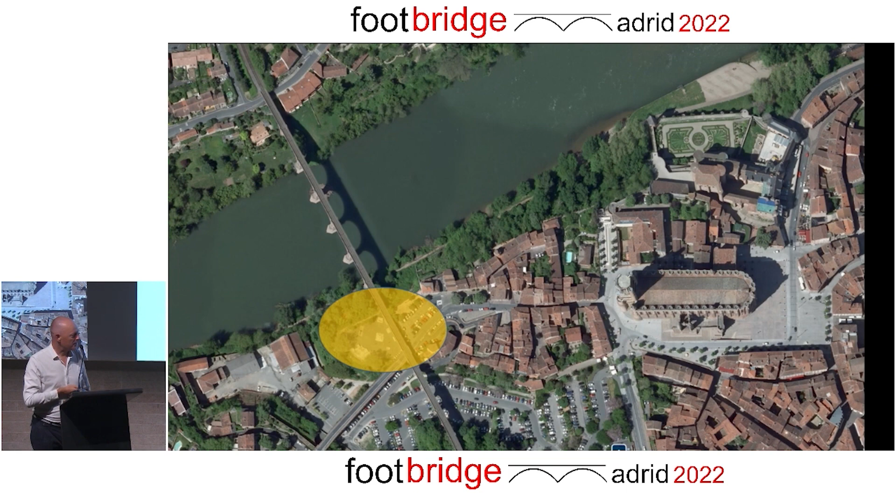And that was the situation - no quality anymore, we are outside the city. And one of the big questions was, how can we bring back quality to this important place, to this important viewing place also? You see it here on the Tarn, because you have the Tarn River here with a curve, and you have a very beautiful view there.

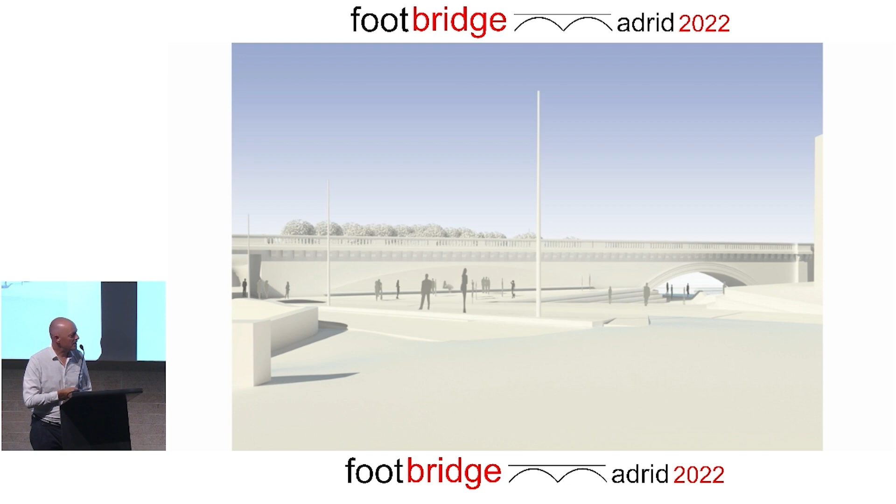This idea of creating a small plaza, we wanted to use it also on the bridge, because it's one of the features of this city, and unite the place outside and inside of the existing viaduct. The important thing was to create a visual relation between the city and the water. It disappeared because this was not visible. We proposed to reopen this, to have a slope, and to have this relation with the water again. And here you see that it works quite well.

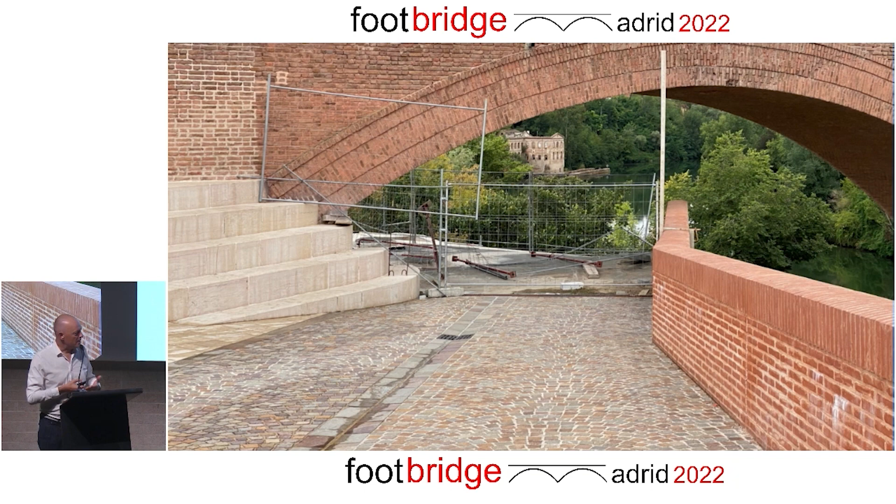It was also one of the questions of the competition: do you build the bridge on one side or the other? We had no choice. By opening this view, it was natural to build the bridge on the other side.

A morning view with the sun on this viaduct, and the materiality of the city. Everywhere this brick, very typical of the region. We used it, we didn't reinvent the walls, we used the same details with the same brick.

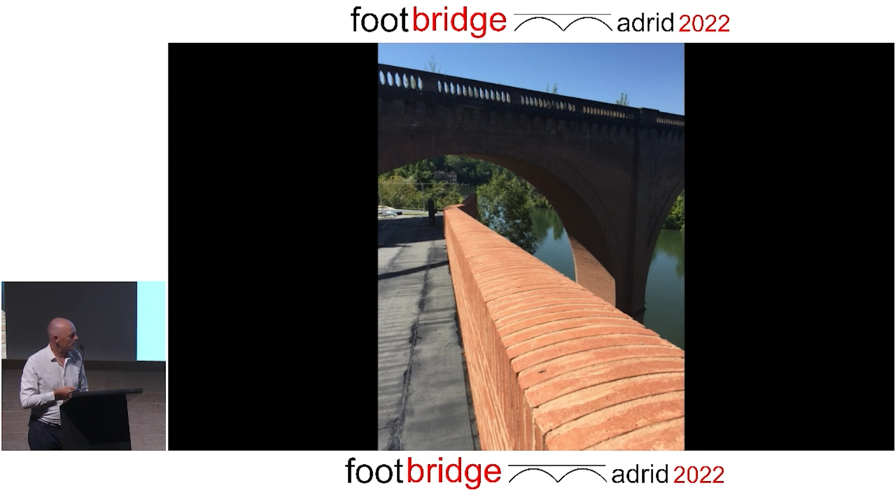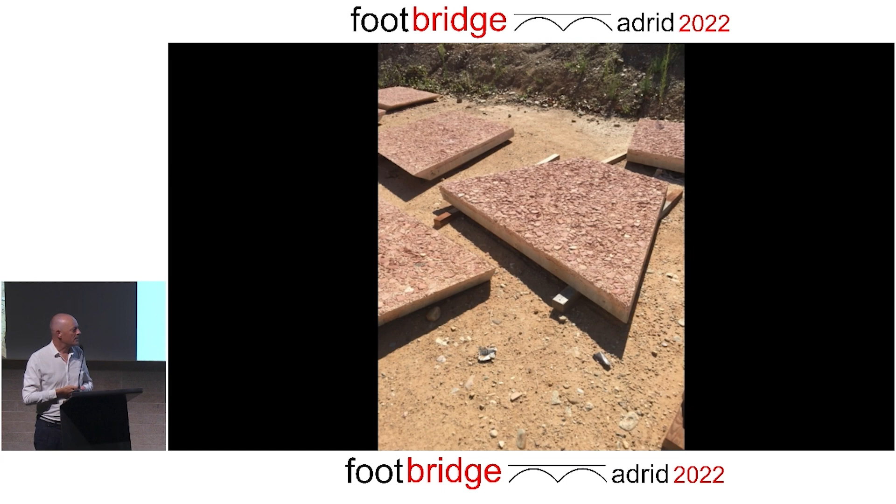But of course it was not possible for economical reasons to use it everywhere. For some part of the retaining wall, we did this concrete, made with the same stones, the same bricks, so it has the same materiality, even if it is not made in the same way. An image in the shadow, I have no better image of this wall.

The bridge itself, yes, you have to react, to have a sort of dialogue between the new and the old. Instead of doing a straight line, there's a small undulation in this line, in this new bridge. I like this because it's a sort of respect of the existing, but it's also a way to show people who pass where they are.

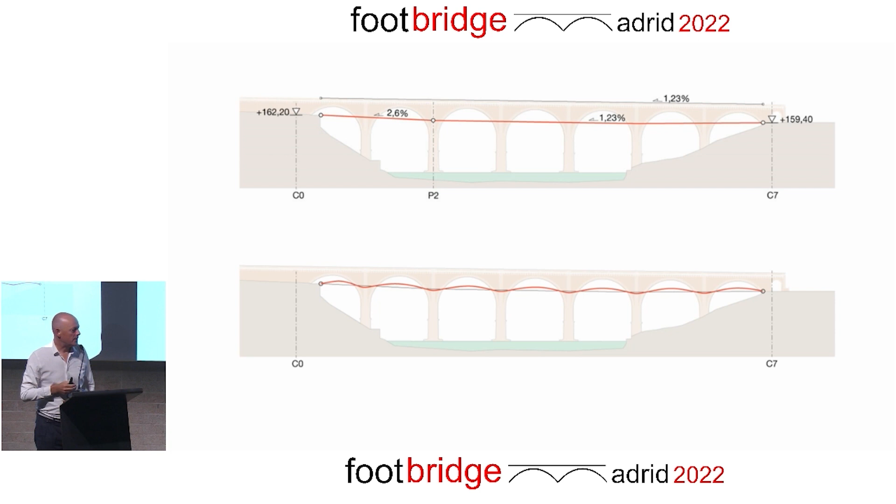So there's a relation between the spanning and the geometry, the user experience when you are passing the bridge. And these balconies, these small plazas, are also one of the features of this new bridge, and it gives new perspective to the existing

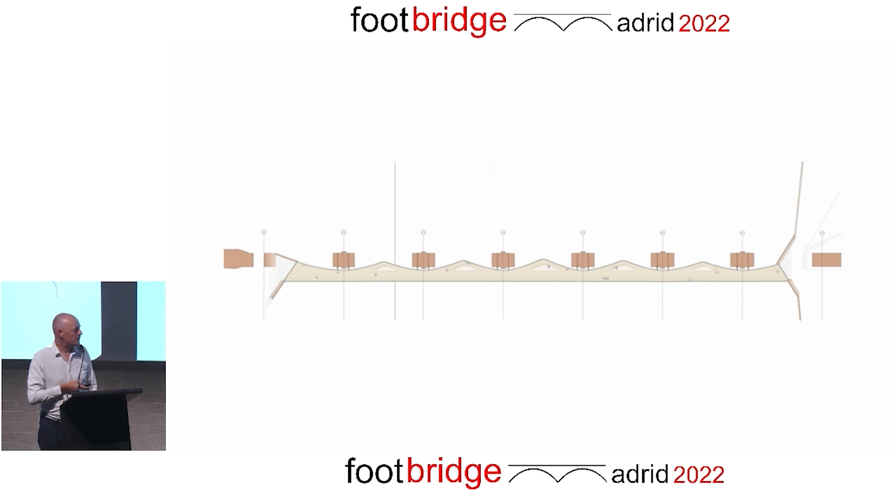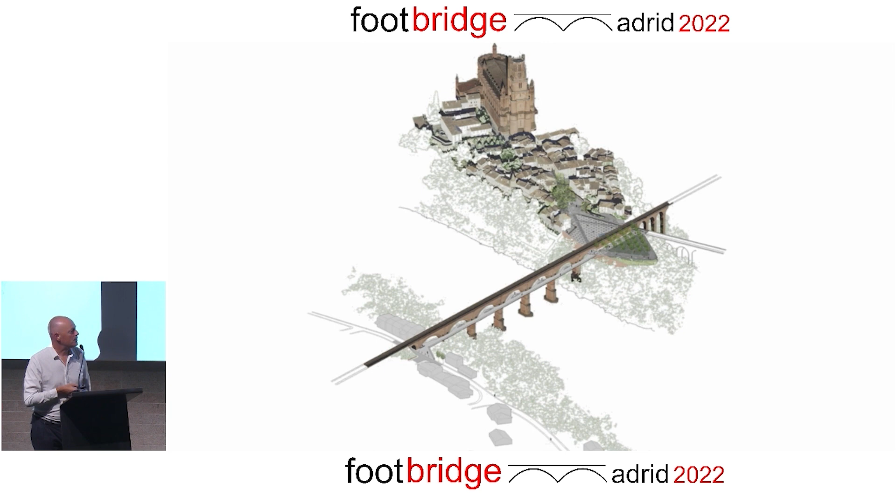city of Albi. And this was one of the important arguments when we defended the project before a UNESCO committee, so that finally we are not destroying the city, but we give tourists and the people there the possibility to view the city in another way.

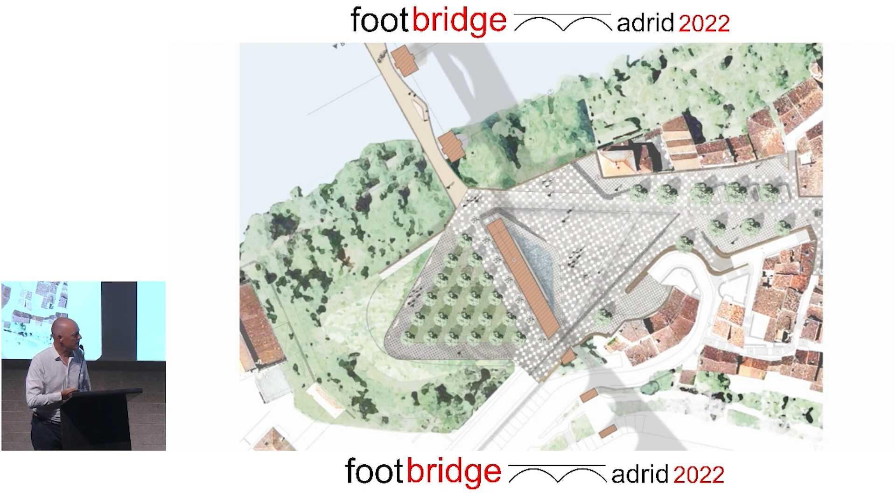The connection between outside and inside, by passing through the first arch, we can recreate a sort of unity between the two parts of the city.

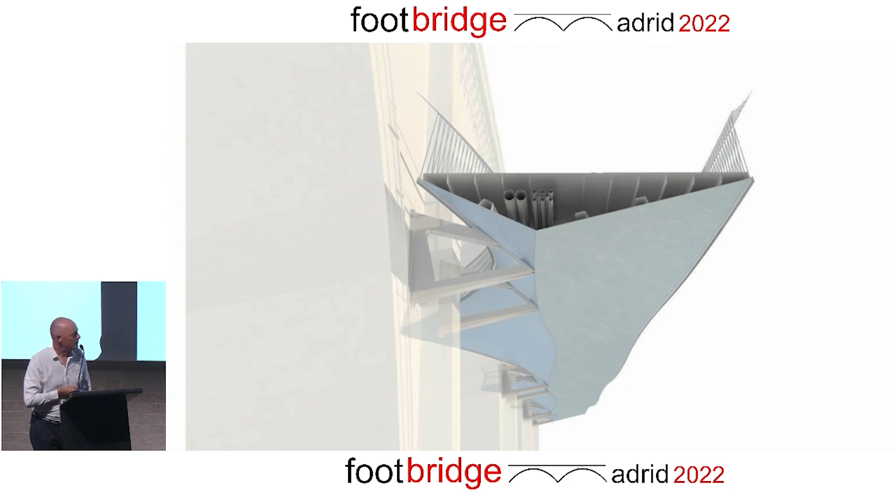Some sections: it's a box girder, triangular, with a variable shape, and some renders where you see that there is real good integration.

And this vibration, it's a little bit like, yes, for me, this massivity of the existing, and this is a sort of jewel, sort of necklace, a sort of cloud, a mist around the existing viaduct. So we are not going in competition. We are using one another to enhance the quality.

Color is important. I always choose the color on site because the reflection of the surroundings, the sky, is very important. So never choose a color at the office. Go on site and choose.

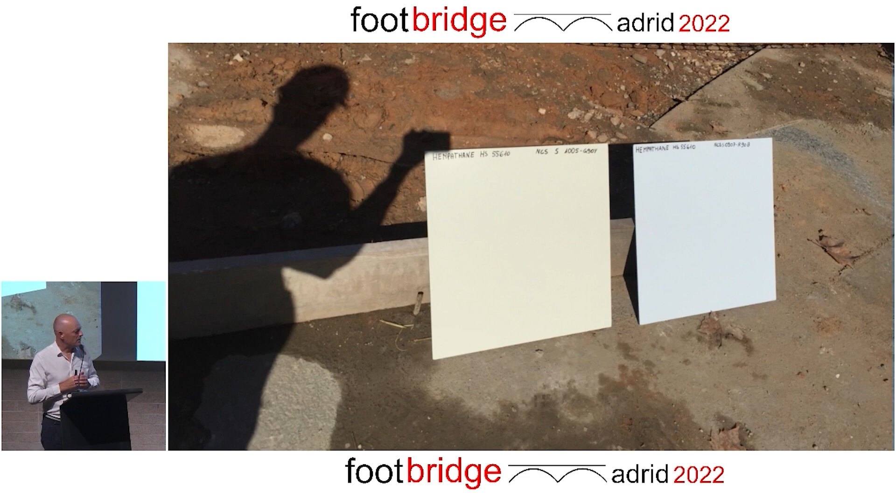And you see that we have two different colors. We have this more beige and the more bluish. The bluish is for the underside and the other is for the top part of the bridge. And that's a sad story about this.

It is not built yet. I took this photo 2 years ago. So the bridge is finished, but the first contractor went bankrupt, the second also. So now we are waiting for the third one.

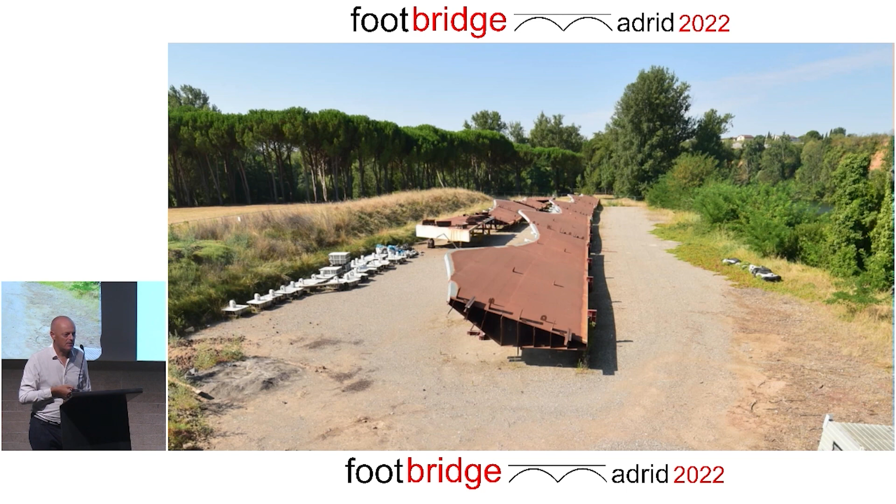That's also the reality of our profession. We are dependent on other persons, and sometimes it works well, sometimes it does not work well. So we're waiting to be built, or waiting to be rusted away, I don't know.

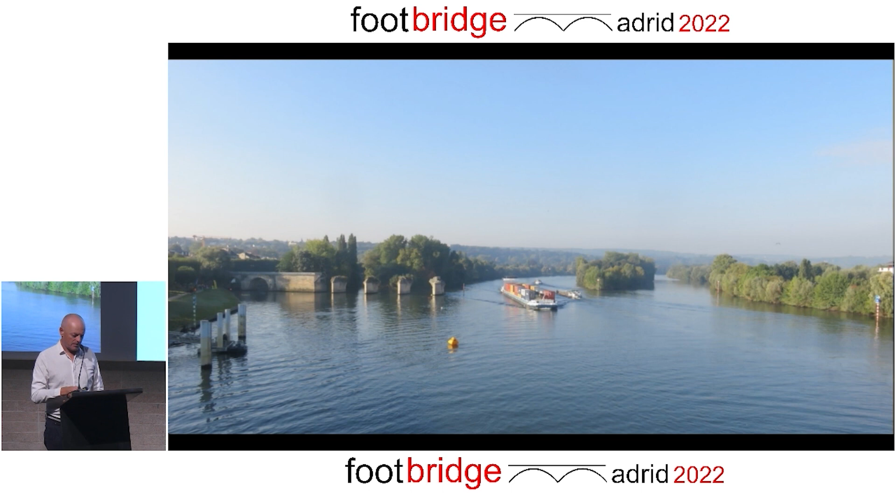Another thing, it's about the bridge in Poissy, where there was this historical link, and I want to tell something about these bridges, because it was not one bridge. Over time, the bridges were destroyed, rebuilt, destroyed, rebuilt.

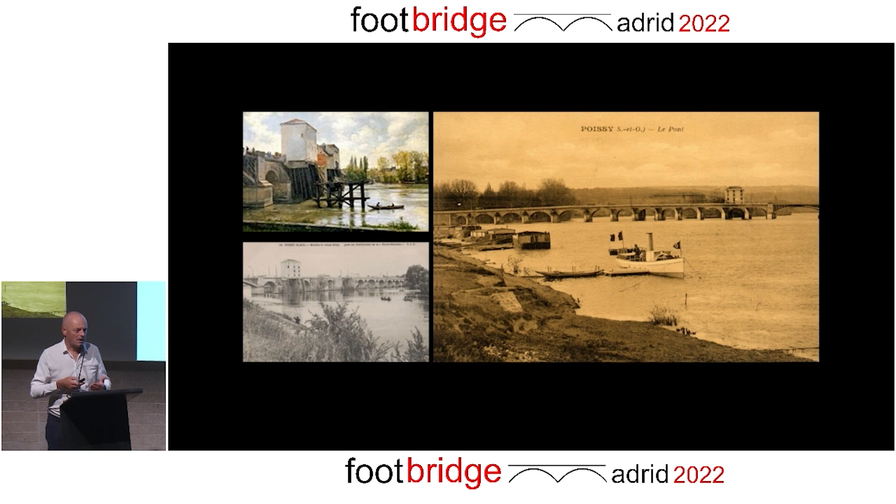But what is the permanency? What is the invariant? It is the connection. The connection stays always on the same place, but the bridges, they change over time. And this is a project about this reflection over time, and how can we say something about this resilience of the existing. It was not possible to touch these piers in the water because everything is protected.

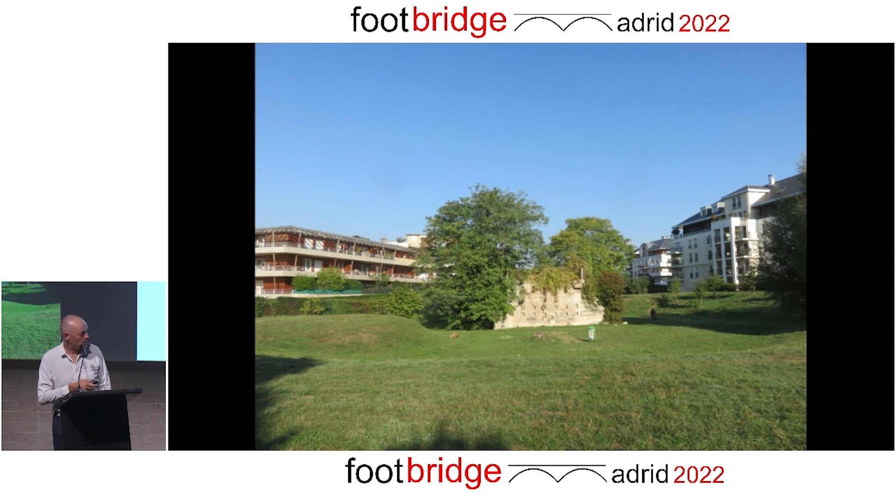And this is the other side, with something which we didn't understand in the beginning because it was in the green and not in the water. And they put also some panels to explain, because otherwise you don't understand.

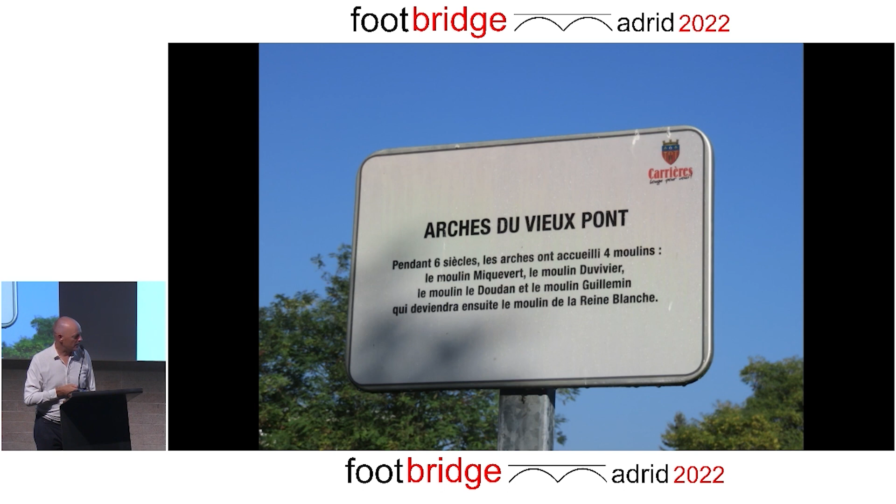And you see also that there were a lot of mills there on the bridges. So these bridges were also a sort of ecosystem because there was a lot of commercial activity, and maybe we can learn something from that.

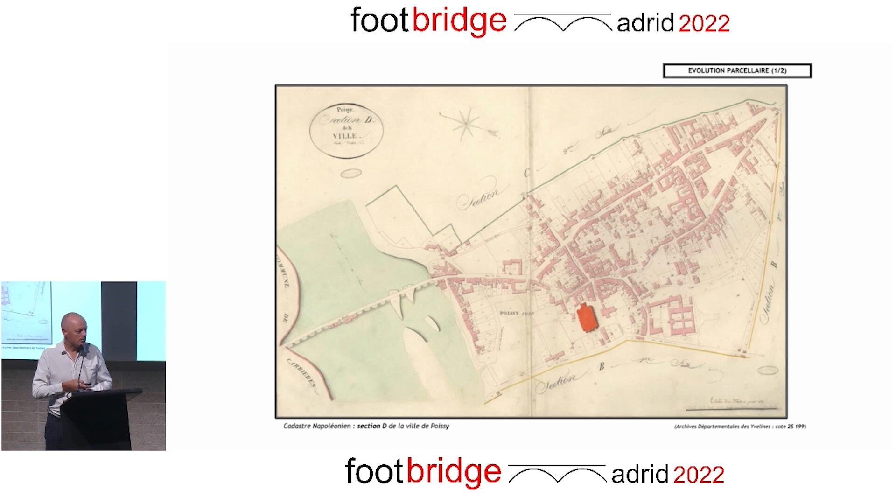Yes, it was in the time, it was a ford, and I think it evolved to a sort of bridge. So it tells also something about this resilience of the connection.

Yes, and we dream to reopen this and to have what we call the Seine tranquille, where it was possible to enjoy the water and to bring back some fish ecology, etc.

We didn't succeed because it was so complicated now to change, because the laws are so restrictive now that you can't get back. Everything was straightened in the 60s, and to reopen is impossible.

So, yes. I want to talk about strategy of design, or how we generate forms.

And in this bridge, it's very simple. It's two surfaces, at 45 degrees. And it gives us a lot of freedom to combine this with the structural effort.

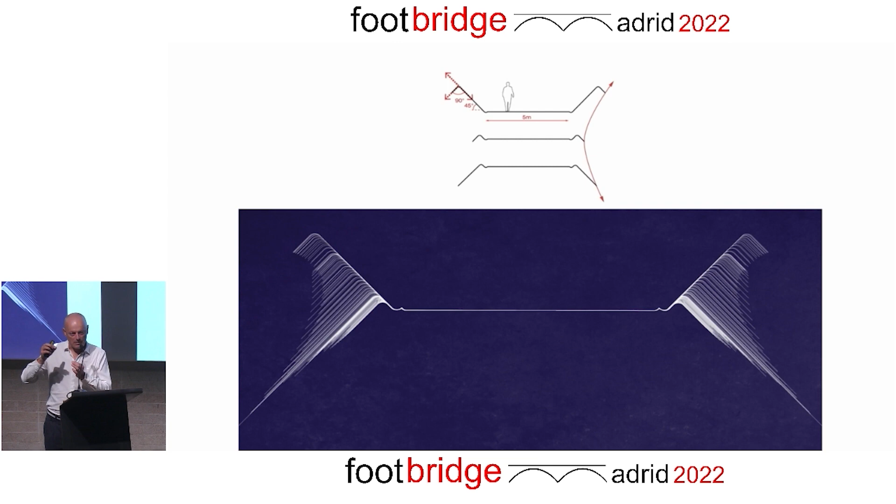So if you need more height, you can extend one surface, but you can also choose to extend the other one. And this simple method brings us a lot of possibilities.

So that's a drawing I made in the beginning to reuse the moment line or the efforts. It's a sort of hybrid between an arch and a beam, and this is a sort of materialization of these moments in this beam.

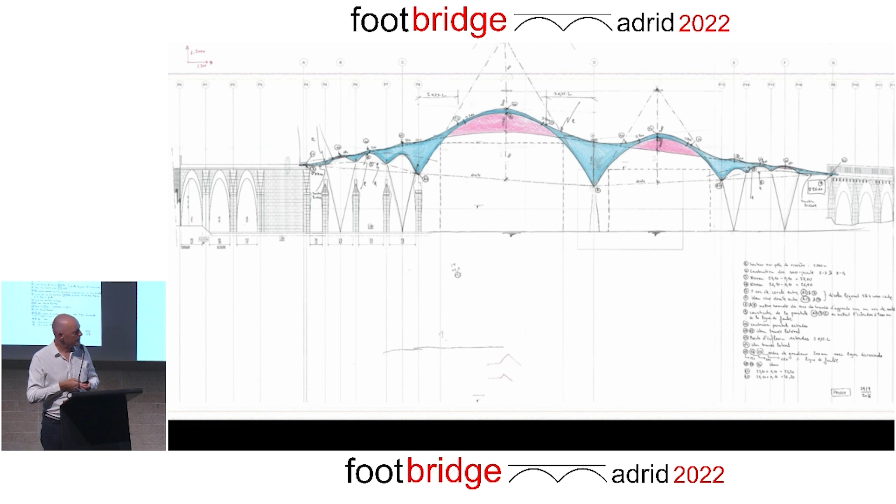The blue surface is the outside surface, the other surface is the inside surface. And when you are drawing in 3D, it becomes a very organic form. And that's the miracle with this: finally something happens with this simple geometry of 45 degrees.

It's 100 meters, so the whole bridge is 300 meters, but the main span is more than 100 meters, second span is 88 something. So it's quite a big span and a very, very flat design.

And this quote from Bachelard about... we wanted that the bridge activate the remembrance of these old bridges which existed there. So there was not one bridge, but there were tens, hundreds of bridges on this site, and this is a sort of symbolization of all these bridges.

We are flying above the history of the site with the new bridge.

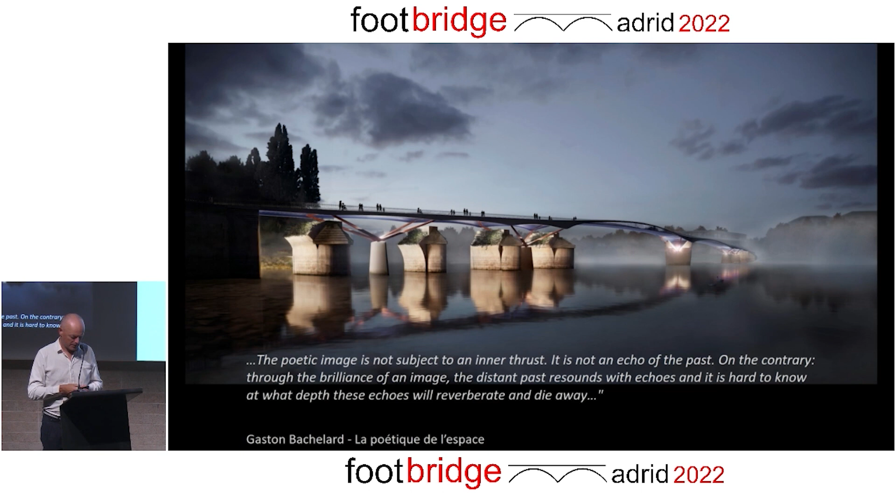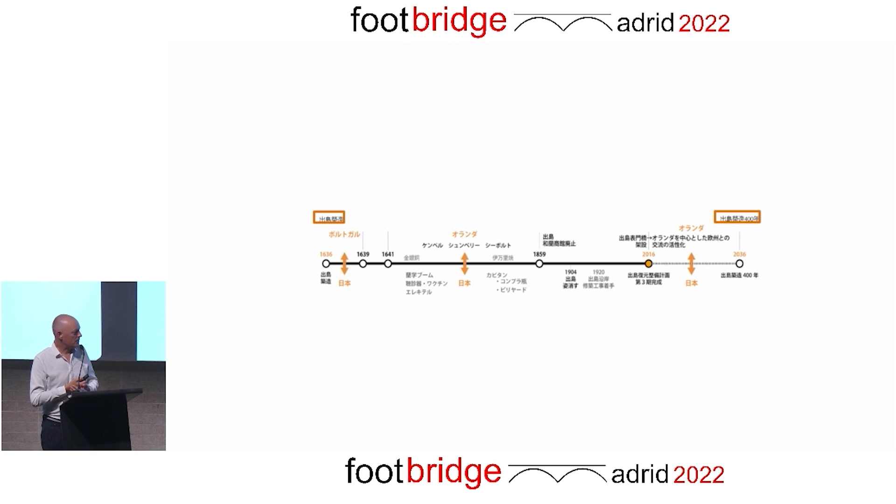Nagasaki, we are going to Japan, and Dejima. Nagasaki, Japan was closed, no stranger, no foreigner. And between 1641 and 1859, there was a Dutch harbor in Nagasaki, and it was a sort of exception.

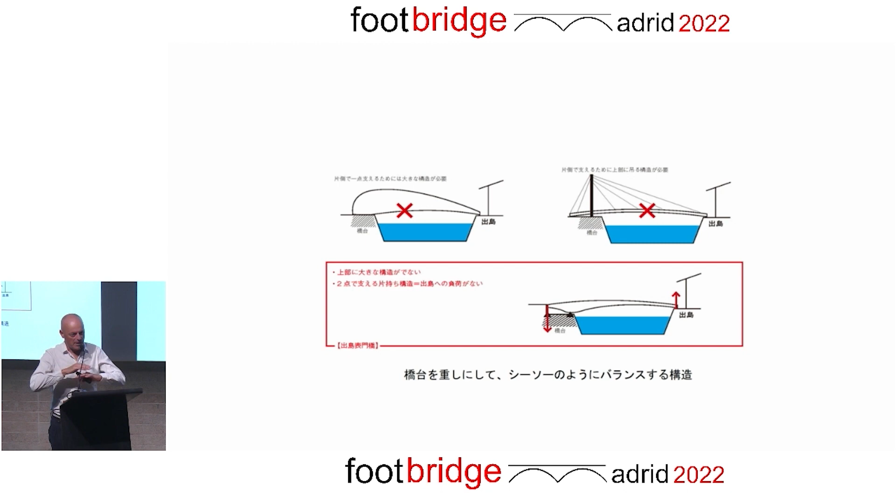We finally proposed some cantilever bridge spanning from one side to the other, which was stable under self-load. Of course, when you are putting people on it, you're getting a small reaction, but this was okay. We made a thin plate, a thin concrete plate, and that was okay.

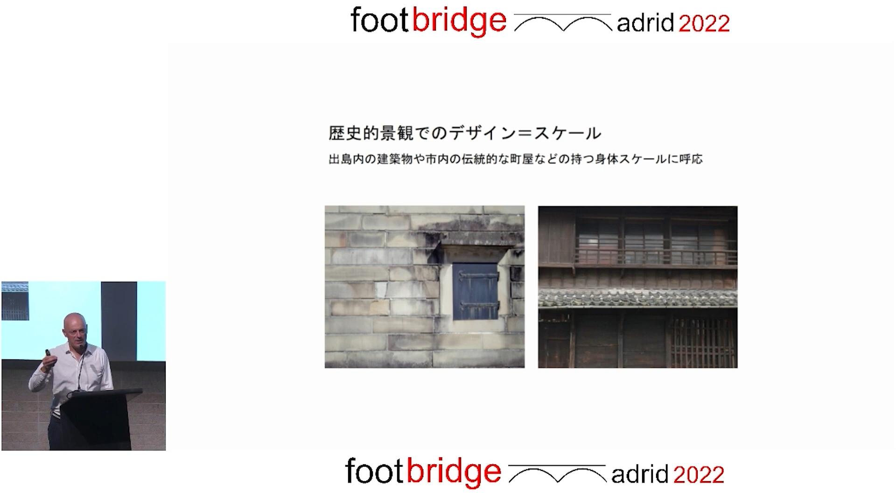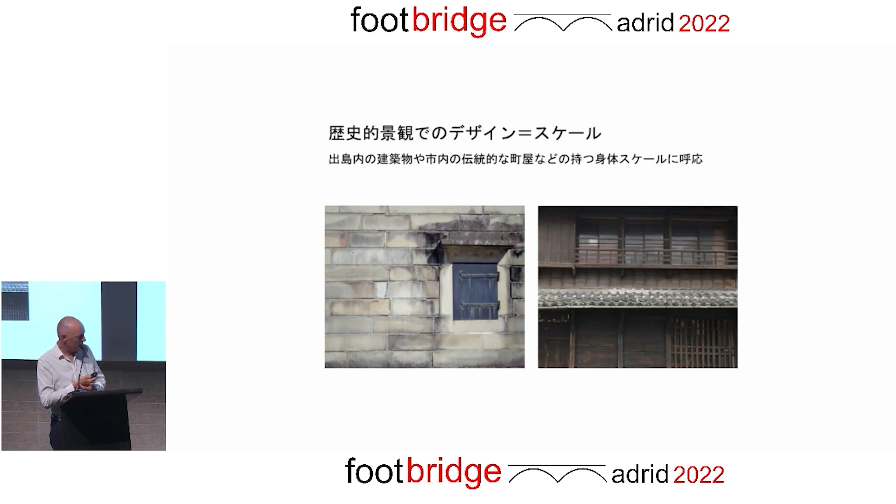How can you use the existing to make a new bridge? When you look at the constructions from the Edo period, you see a lot of horizontal lines, vertical lines, and a small scale. Two examples, I think everybody understands that intuitively. Our design was finally about these lines, horizontal and vertical, so we combined these two and tried to make a bridge with it.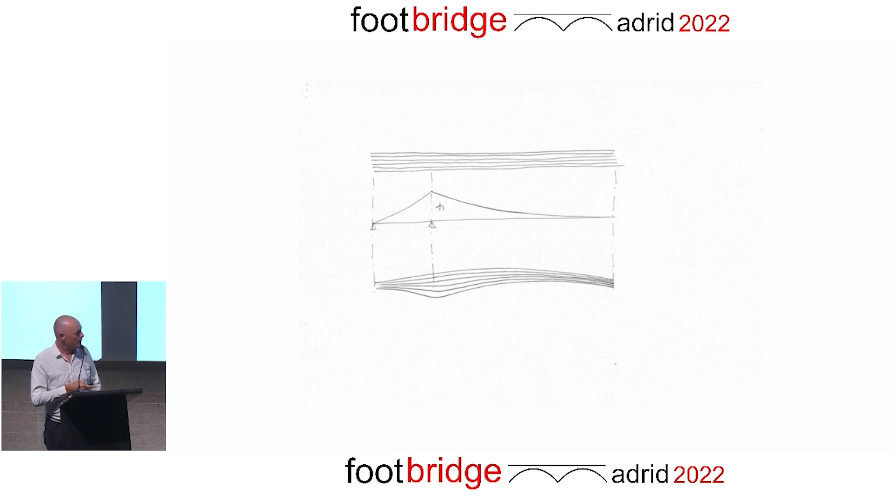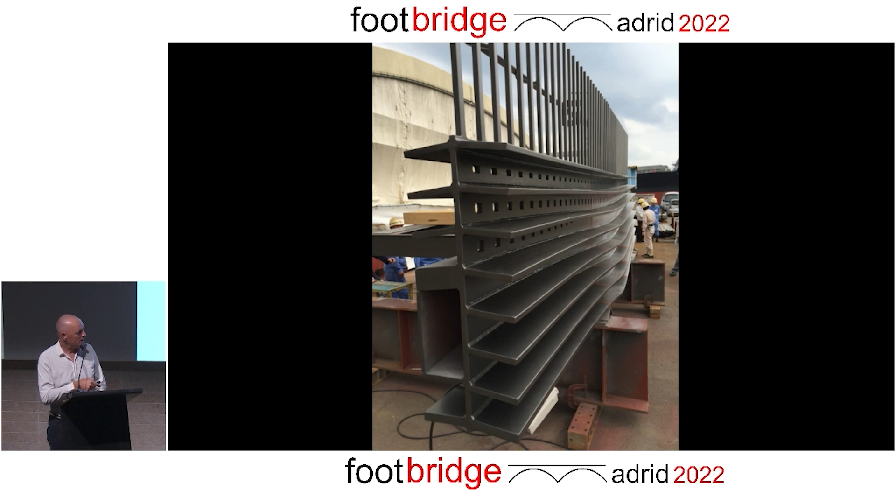To this horizontal line, of course, we proposed again the structural need. So we increased the height where it was necessary and decreased it where it was less needed. This is a part of the bridge, a beam, so you see the web which was laser cut, and the railing is also part of the web which is laser cut. Then you have these horizontal stiffeners.

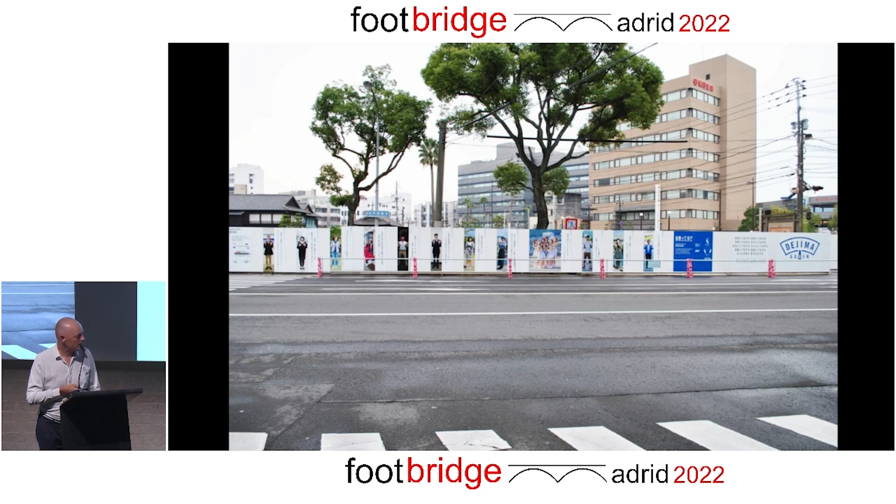It's also about acceptance, acceptance of the people, of the community. We worked a lot, and I say we, not we alone, with all the people there, to create a sort of acceptance of this new project, to explain why it was needed and the connection to the past. So this was the symbol of Dejima.

Finally, I think it's very important that you bring the people within the process. And if you do it well, the things are accepted. You see here, yes, in a lot of things.

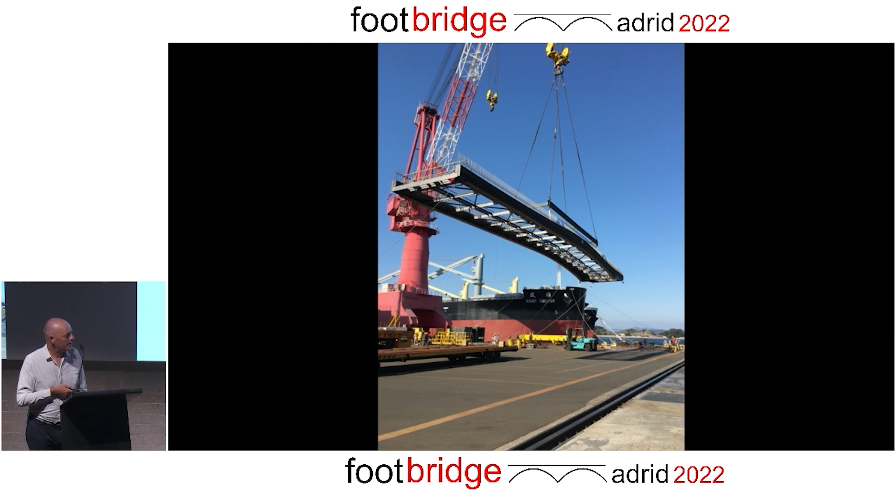Finally, the day it was erected, you see half of Nagasaki was there to see the erection of this bridge. It came with a ship, passed the city in the night, people also looking in the night, and thousands of people looking for their new connection to the past.

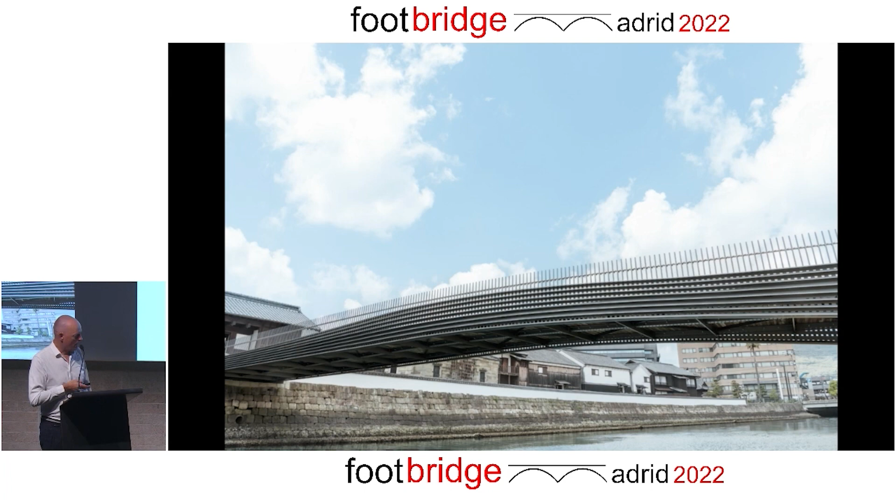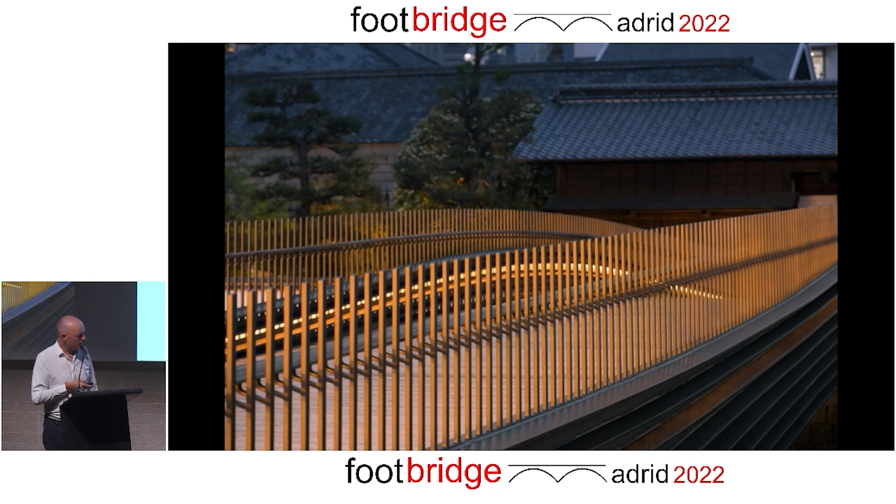You see that the color changes with the sun, and you have this small dot lantern effect of the lighting.

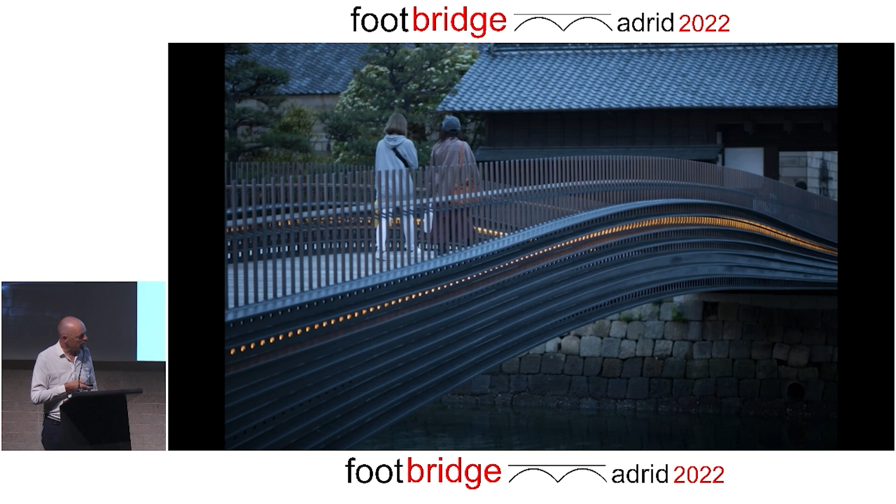Singel Park, this is a little bit more funny. I think I have to go on quickly. It's about a circular park. The funny thing is that it's also linked to Dejima, because there was a close link between the Hortus Botanicus and the island of Dejima, but okay.

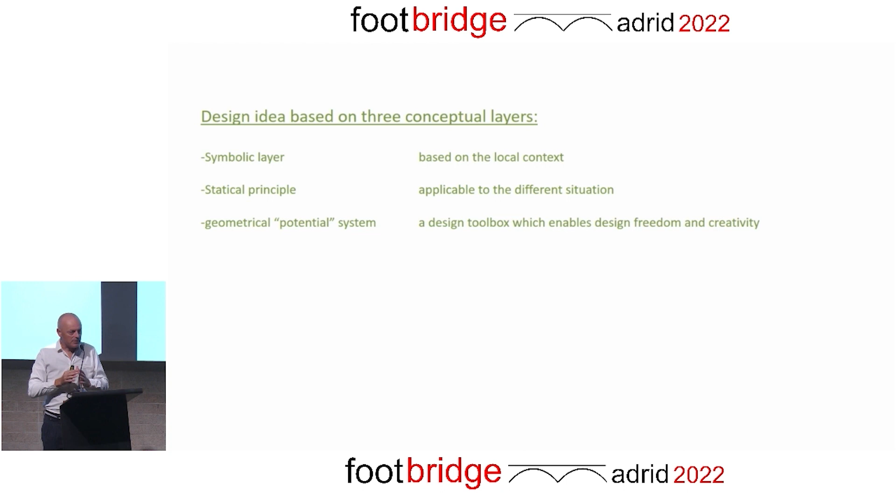So in this Singel, it's the old waterway around Leiden. There is qualitative nature, but it was not connected. The idea of the city and of Lola Landscape was to link all these small parks, so we had to find an idea that would link all these bridges, which had really different constraints, big spans, small spans, high. It was always different, and we had to have a strategy to link everything.

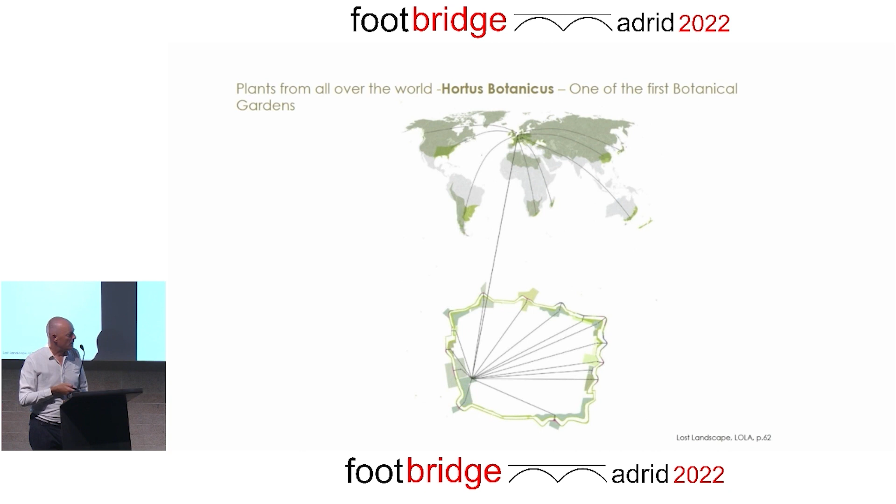This strategy finally resulted in a sort of design toolbox which we use. So we didn't really have one design, but a way to design. There's also a symbolic layer about this Singel, this circle, this sphere. We wanted to use the sphere as a symbol of the earth, but also, if you look at this, you see the whole world around, and a sort of link also to the Dutch culture.

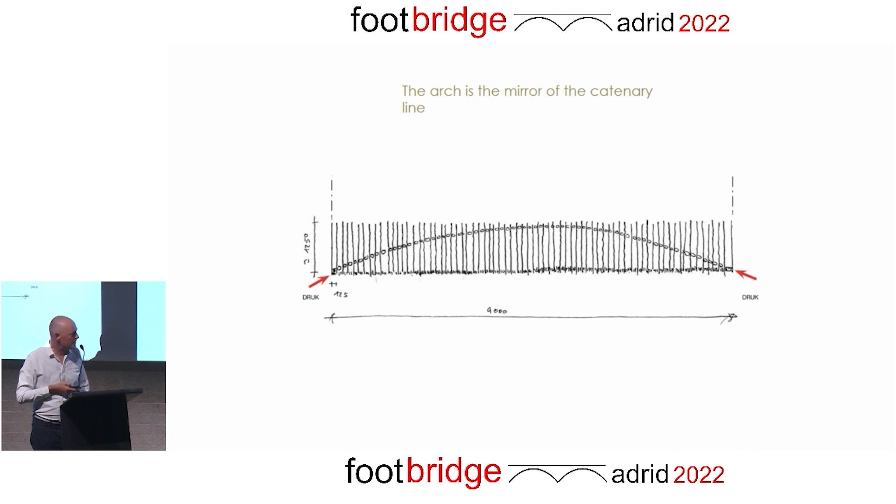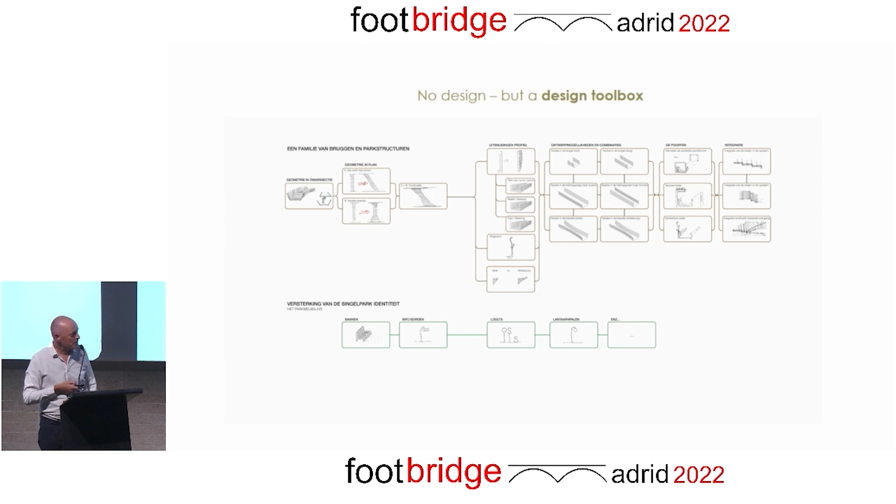The structure, the catenary, which when you invert it, of course, becomes the arch. This beautiful landscape artist, Martin Hill, to express this stability or instability, so we used this with vertical posts. This was our design toolbox, where it was possible to make all imaginable and not imaginable bridges.

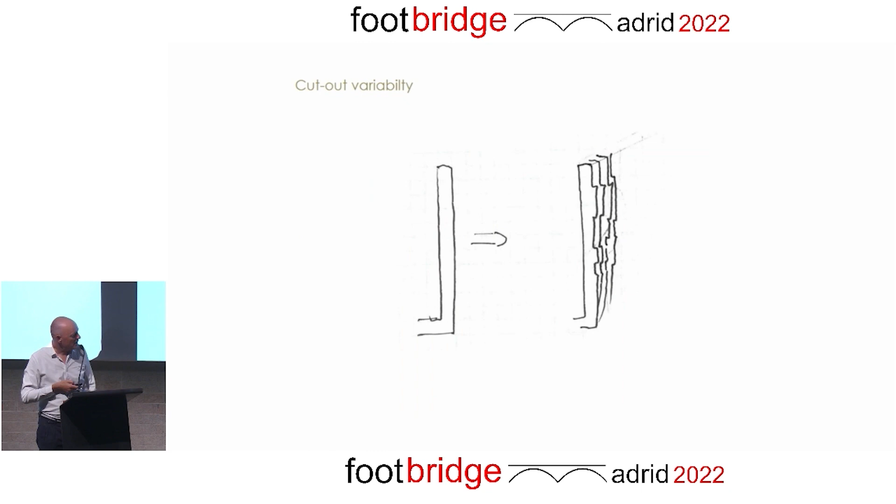Variations in length, in inclination, skew bridge, variable width, combinations, etc., etc., things in the railing.

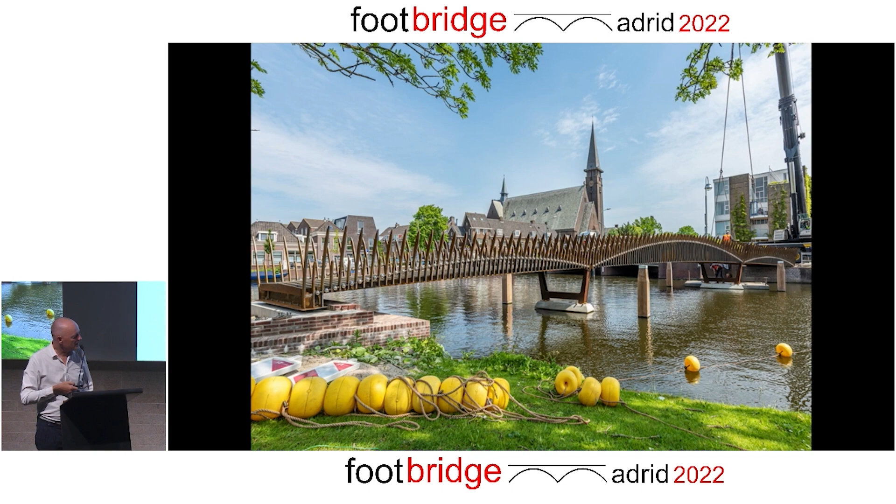Finally, this is the result of the bridges. It's in Corten steel and the balls are in stainless steel. This one was special because it was a mobile bridge, but the material remains the same. A very small bridge here.

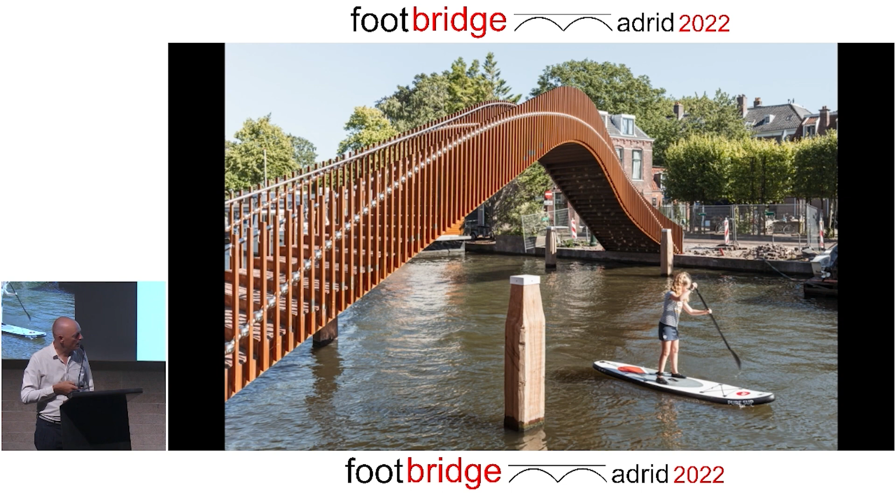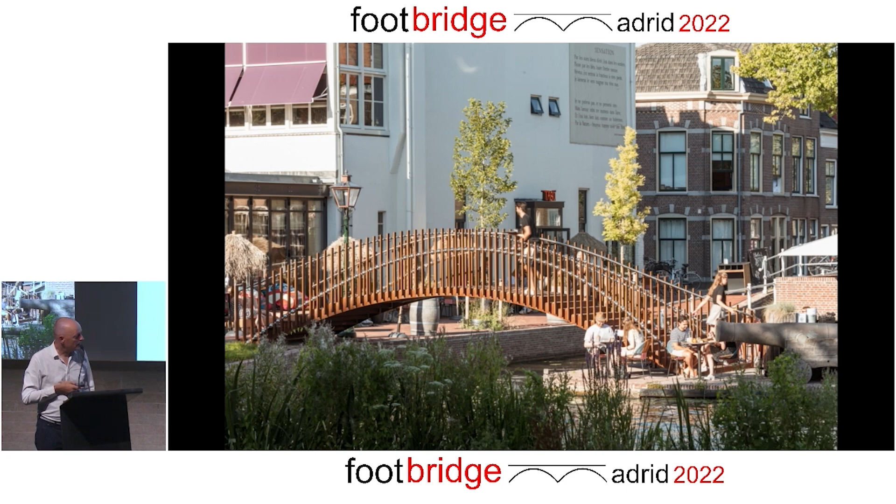And maybe the most impressive and beautiful one, it's over the Oude Rijn, so the old Rhine River, and this expression of the thrust line by these balls, which are structural, of course, and the last bridge.

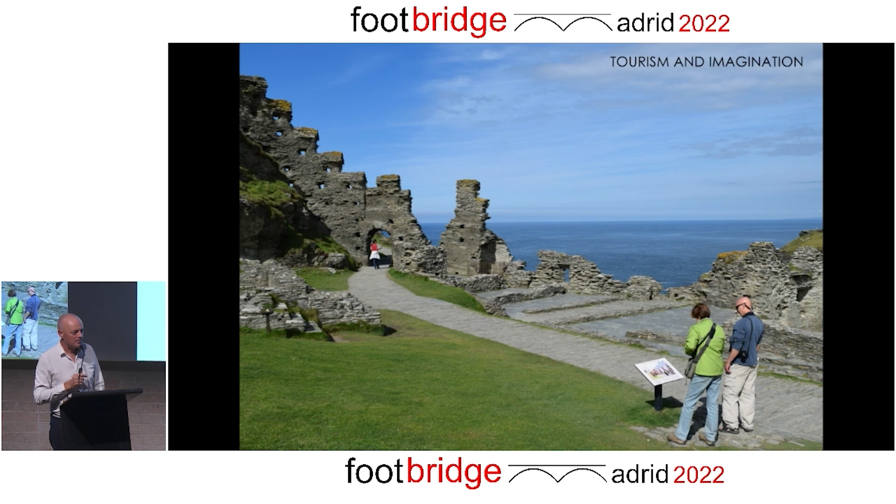Tintagel. I will be quick on Tintagel because Bart already told things about it, but it was about imagination. There is nothing to see on this site, so if you want to go there to see historic elements, there's nothing, but the landscape is really impressive. So, as you know, we ended up with this cantilever bridge. And what I like about the cantilever bridge is that it's a very old type of bridge, because the arch bridge was invented maybe 3,000 years ago.

The Romans brought it to Europe 2,000 years ago, but the Celts had these cantilever bridges already before. So it's very intuitive - you take elements, put them into the void, and advance. It works very well. The Firth of Forth had the same type of problem, a very big span, but with small elements. You can handle only small elements, and it's a natural way to go. So again, we didn't invent something, we used a system which existed.

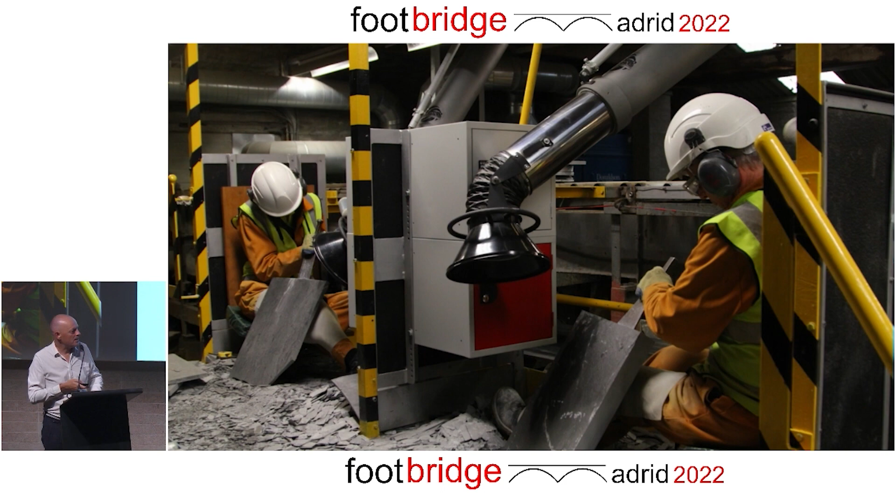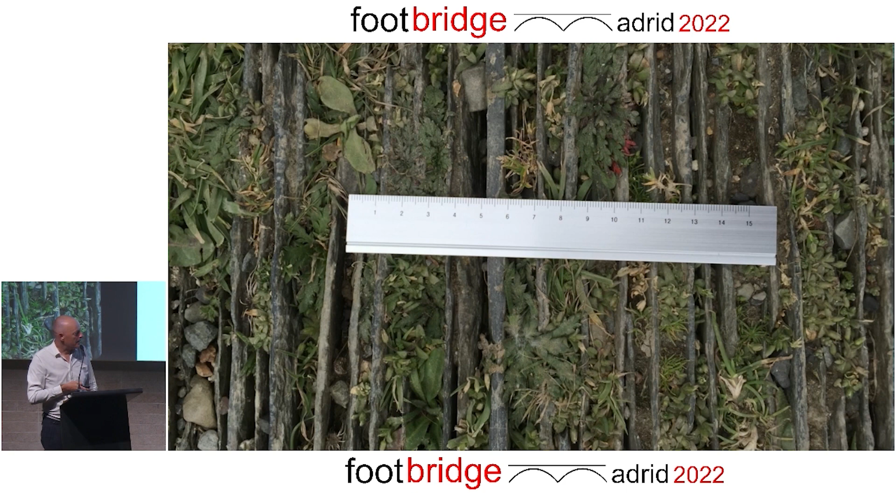About materiality, nature is very strong, but also these slates, you see them everywhere. We went to the quarry, about 2-3 kilometers from there, which has been in use since Roman times. This is a photo I took the first time I was there, and you see these slates staggered on edge with small plants in it. This was inspiration for the deck.

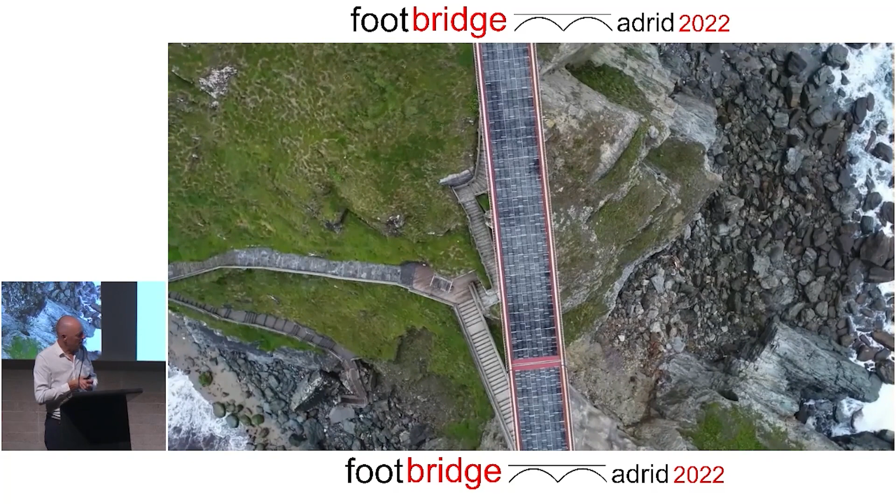A photo of the deck. We had stainless steel trays where this element was staggered in. It's about 7.5 centimeters, so they are not fixed, they are only posted. I'm quite happy about this photo - you see that there are already small plants coming here, and nature comes back also. So it will merge into this nature. I'm quite happy about that.

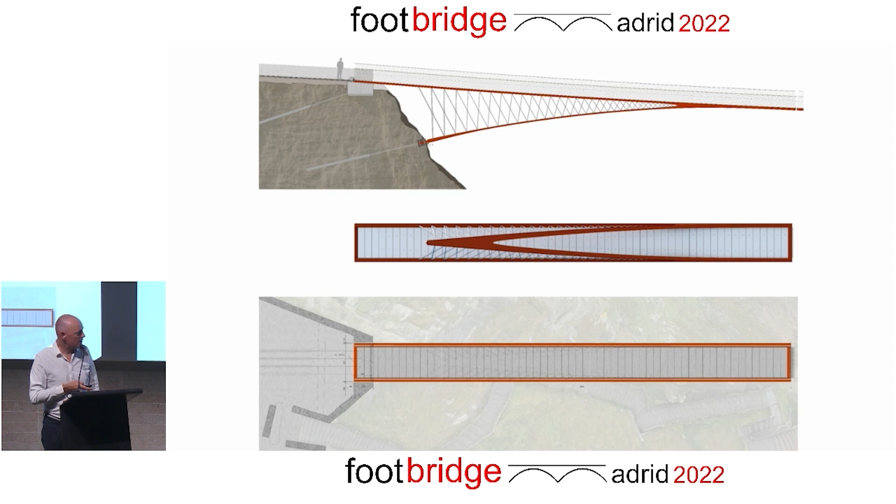Cantilever, 35, 36 meters, 4.5 meter height. And color again, truth is on site. This is William, our local architect.

Building was, of course, not easy, so we did it finally with a cable crane with our French friends from VLM, who had experience with it. It's about 4 to 5 tons we could lift. That was the maximum, so everything was designed to be in this range of 4 to 5 tons.

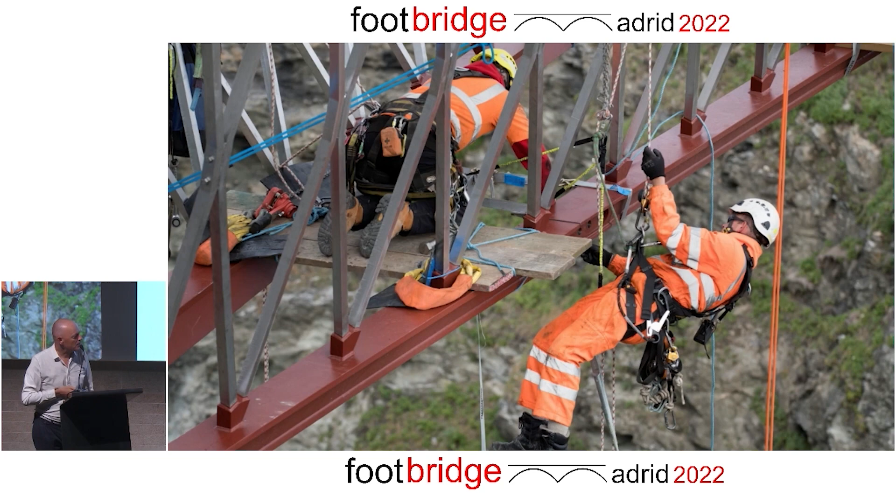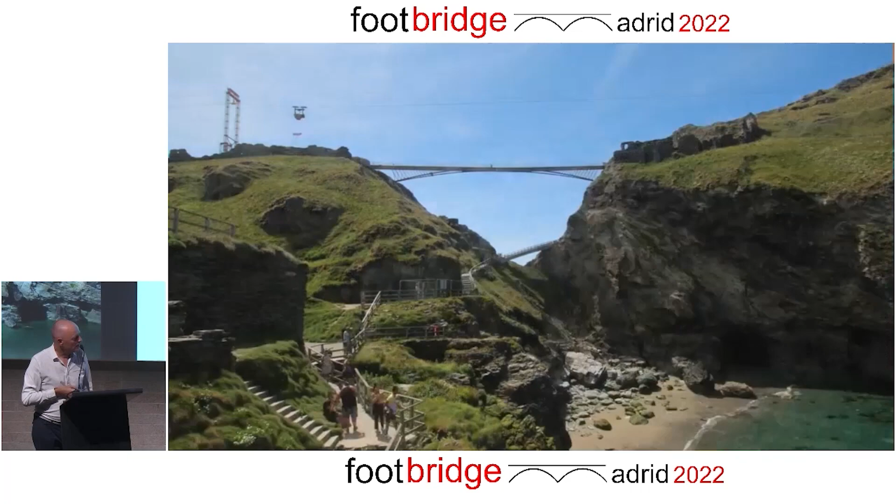A time lapse - it's quite funny to see, also quite funny to see the flexibility of the structure. You see it also up here, we adjust a little bit. We put the slates in, the railing is put in, etc.

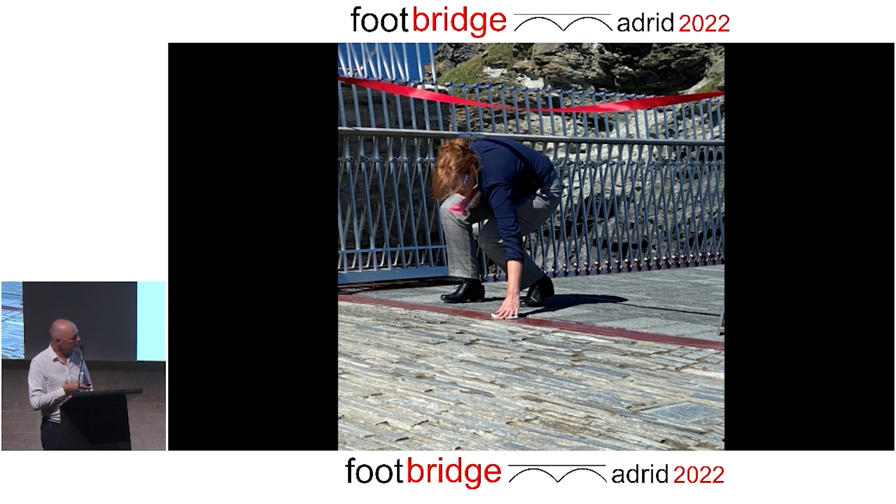And then the big day, cleaning still a little bit. I added yesterday evening this photo because it's a new king, but it was the Duke of Cornwall, and it was, or is, the landowner. So it was not our client, but he had a look at our design, and sometimes he had some suggestions, but it was okay - no, it was really okay.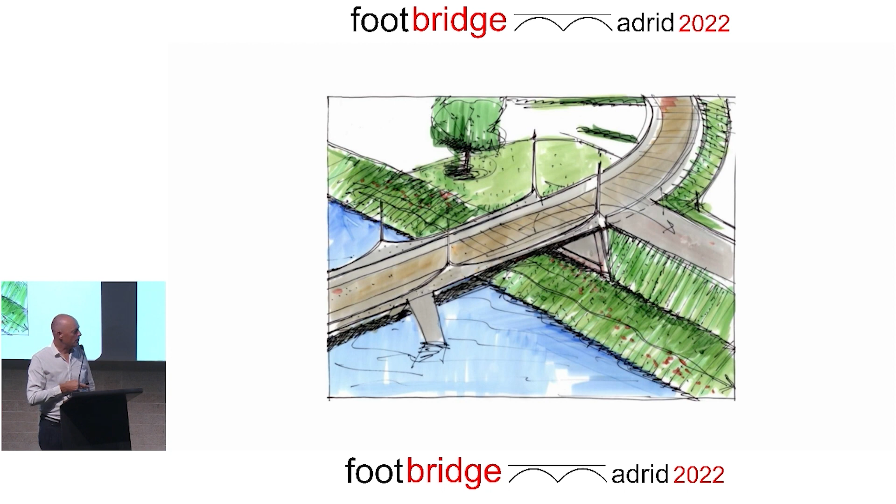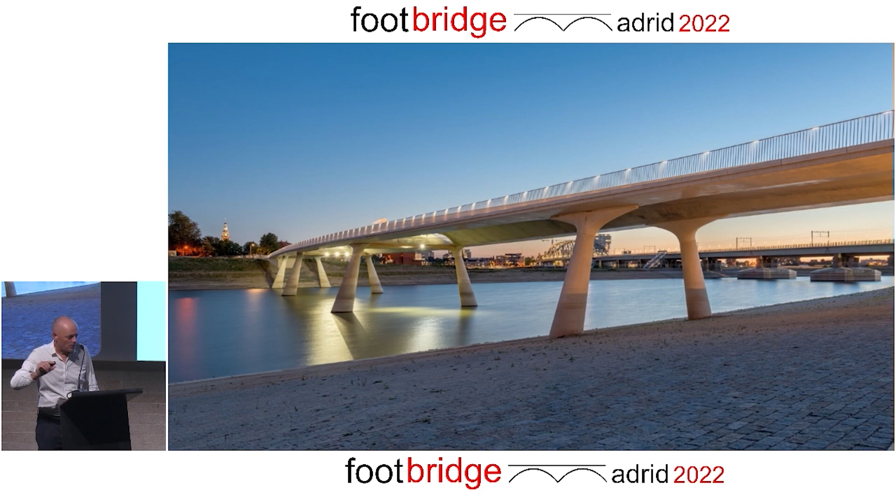Finally, we ended with that. I will not go into detail about the process, but it was a participative process with the people there, and we ended with this - yes, a UFO bridge, I don't know. It's quite a strange design, but it's very coherent. It's one surface, one shell surface of concrete.

I wanted to show that for the use - it was about creating experience here in Madrid, and what happens when the designer leaves and the bridge lives its own life. I was there - a small thing we did: we realigned this bridge to the church, to create a relation between the city and this new bridge. It's very simple, it didn't cost anything, and I think it's highly efficient.

Okay, what happens when the designer leaves the bridge? It's one year in the life of a bridge.